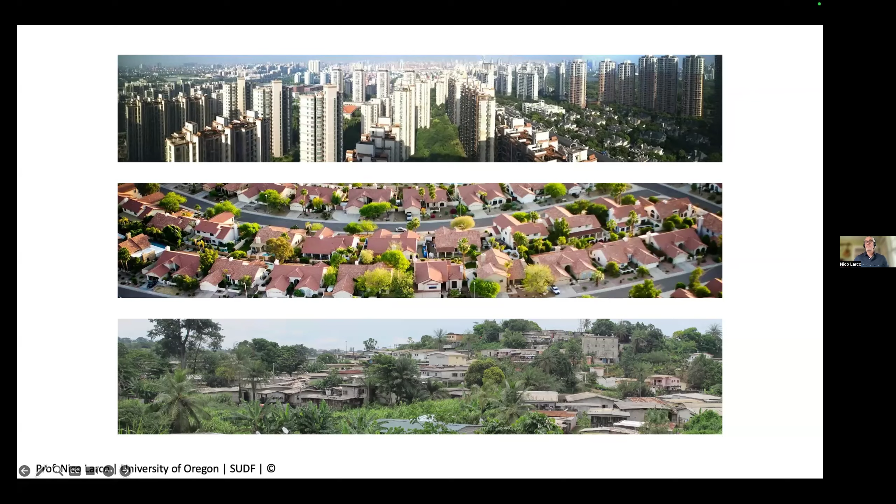Why is this important to do? Well, I think there's a lot of agreement—I'm going to guess people in this meeting agree—about some of the negative impacts of being unsustainable. But partly it's just to try to understand, if we want to be more sustainable, what kinds of things should we do?

What is it we should be focused on? What needs to be done? How do we compare and evaluate different places, and how do we shed light on false claims, looking at all these range of different issues that exist, everything from how you deal with stormwater to ecological areas to obviously transportation networks, metropolitan footprints. How do we put all these different things together?

And it ranges from all sorts of things—obviously a lot in transportation, urban ecology, urban forestry, a lot with stormwater kind of issues, equity kind of issues. There's a ton of different work that happens here.

The problem that exists right now is that a lot of this work is completely siloed, in that the people working on these topics know about them, but they don't know about the neighboring topics. There's a whole lot of jargon related to all these things. And because of all the siloing, there's very little overlap or understanding of how action around one topic is really impacting, or could be benefiting, other topics.

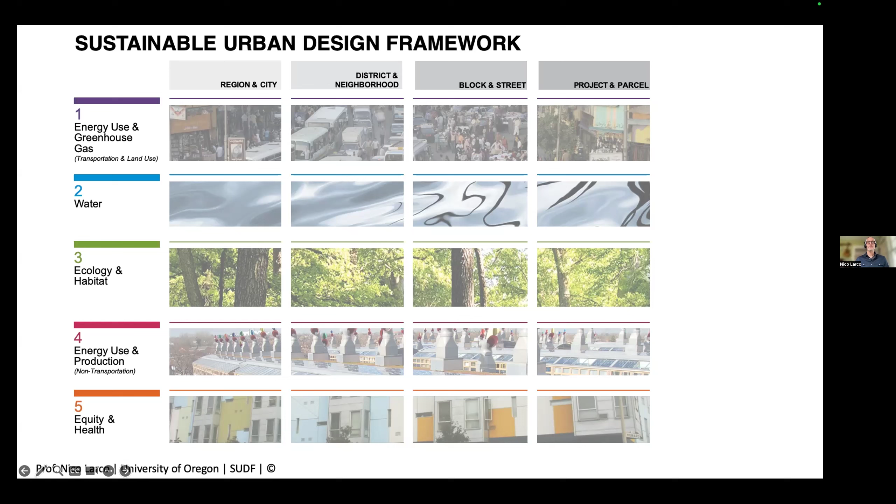So with this, we've organized over 50 specific physical urban design elements—physical things you can do in the city—around these outcome goals and these scales.

I just put a link in the chat, which you can use to download the actual framework. You don't have to try to read all of this here.

What this does is give you a tool to help you understand how you can work on projects. So for instance, if you have a project at a specific scale, this gives you an idea of all the questions you should be asking in that project. It gives you almost like a design guide, a sense of what kinds of things you should be dealing with.

You can also think about it in terms of outcome goals—if you really want a specific outcome goal, here's all the different things that need to happen at different scales to get there. So you can use this as a design tool, as a stakeholder engagement tool—stakeholders typically know this part really well, and it helps them interpret what exactly needs to happen in the built environment to get to that outcome—or as an evaluation tool. I'll talk more about those later.

So this is the basic structure of the framework.

So here we go. I'm going to go through fairly quickly some of these different pieces to give you a sense of how it's organized. I'm not going to be able to cover a ton of this, but hopefully give you a sense of how it works.

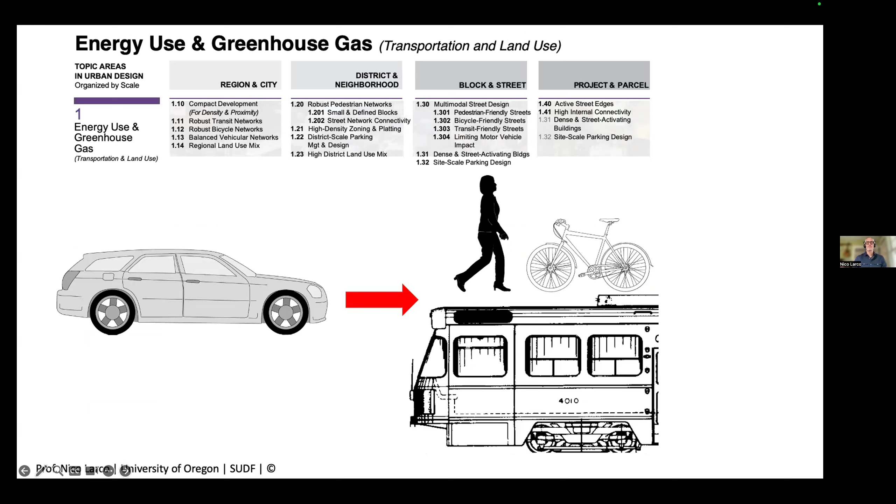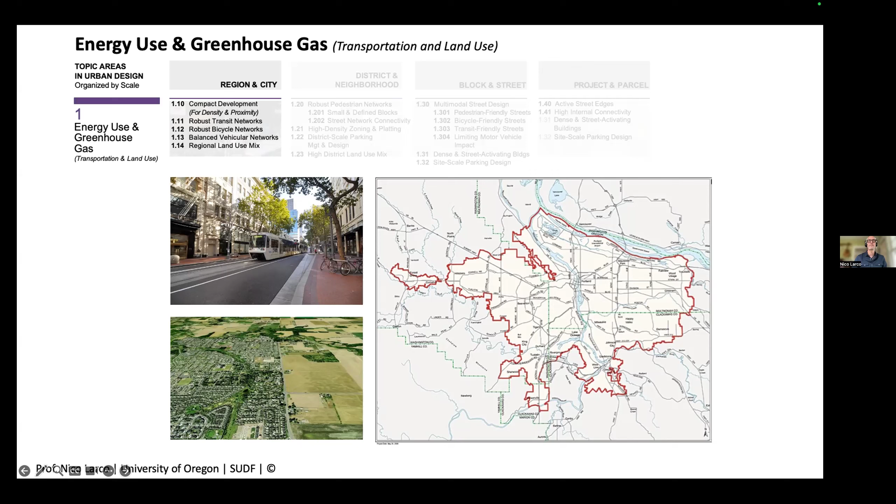We're also thinking at this scale about transit networks, large-scale cycling networks over the entire metropolitan area, and how we have balanced vehicular networks so we're not letting cars dominate. Then also the regional land use mix at this scale — how the distribution of uses across the entire region is evenly balanced, so we don't have all our industrial in one area, all our residential in one area, all our commercial in one area.

So that creates all sorts of problems, and we tell people, well, let's just get in the car, I'll just drive there. So this idea of connectivity, street connectivity, really matters a ton at this scale.

We can also think about our district parking approaches — how much parking we're requiring and if we're allowing strategies like district parking. And then finally, the land use mix at this smaller scale — this is the 15, 20-minute neighborhood idea that could be happening here.

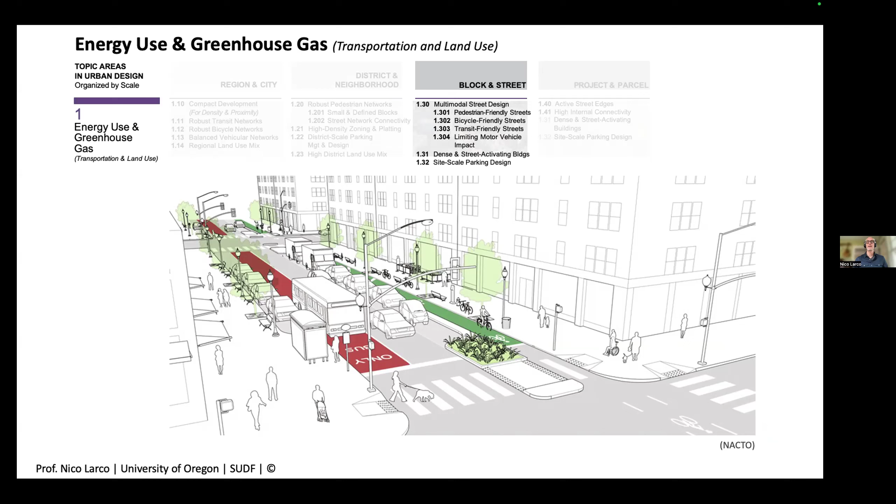We also think about parking in this part more — not just the amount of parking we have, but really thinking about the parking design.

So things like the scale. Is parking on the corner or not? Do we put the building in front on the street side of the parking? How big are our curb cuts that we have along that? What's the edge condition of the parking lot design? So we're really thinking about design of the parking at this scale.

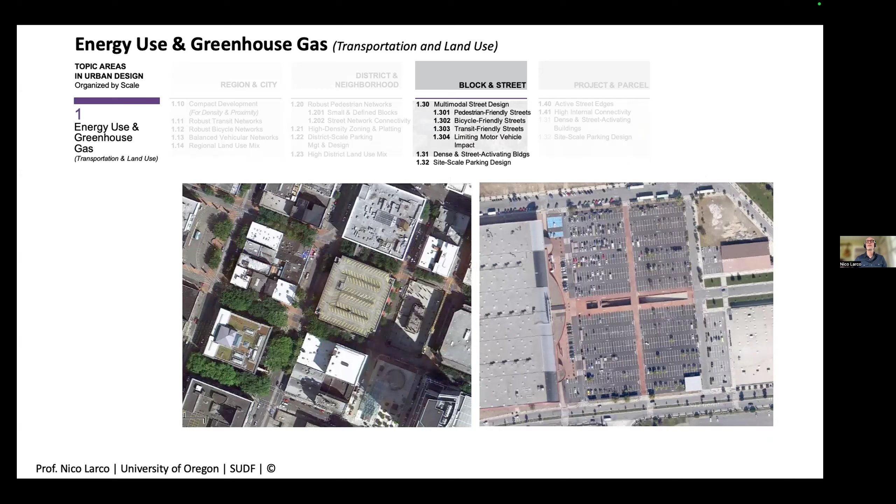And then finally, at the project and parcel scale, a whole lot of this really has to do with what we call active street edges. How much is the building really contributing to the pedestrian cycling environment on the street?

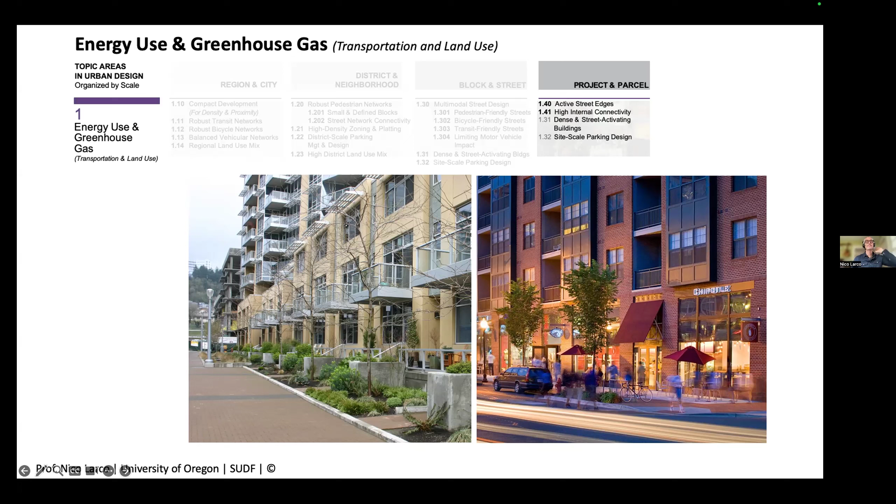Okay, so that's energy use and greenhouse gas, transportation and land use. I'm going to quickly go through some of these other topics.

So talking about water, there are really two strategies we think about: one, minimize the amount of runoff you have, try to have less water moving horizontally, and two, mitigate where runoff does happen.

This slide shows the difference in impacts of development. In an undeveloped area, when rain falls, 25% goes deep into the ground, 25% shallow, 10% becomes runoff, and the rest is evapotranspirated. In developed areas with a lot of impervious surface, only 5% goes into deep infiltration, 10% to shallow infiltration - huge problems for refilling aquifers. But then 55% is runoff, more than 5 times the amount we have in a natural system.

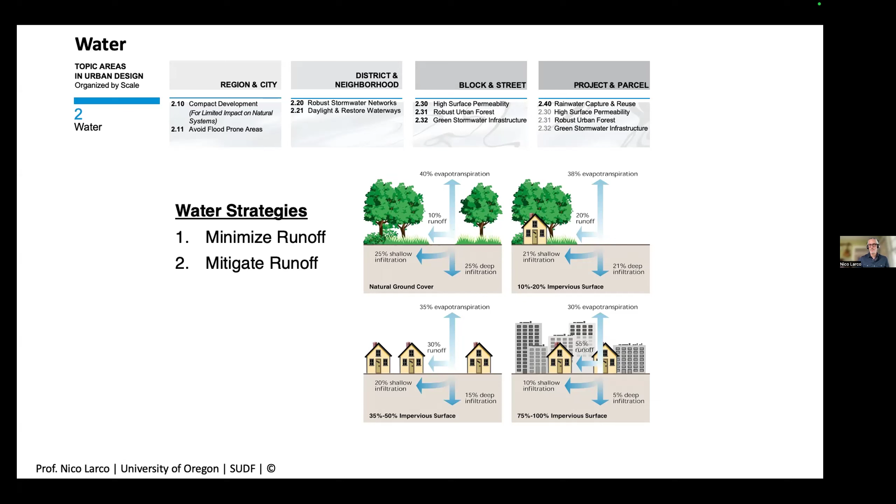So how do we deal with this? This creates all sorts of problems - the runoff is typically a large volume, hot, picks up pollutants, creates erosion, all sorts of issues.

So ways we can minimize the amount of runoff: first, at the region and city scale, really compact development. Instead of developing evenly across this entire watershed and impacting the entire water system negatively everywhere, concentrate your development in one area and let the rest of the watershed remain more in its natural state. This reduces the amount of roads, impervious surfaces, and pollutants brought into these areas. Compact development is a fantastic tool for all different parts of sustainability.

We can also do things like, at the block and street scale, reduce the amount of impervious surface - thinner streets or permeable paving can happen in these areas. And also, at the block, street, and project parcel scale, use trees. Urban street trees hold a fantastic amount of water before it ever touches the ground. You can see here, after a storm, how this area is completely dry, all held based on the canopy, branching structure, bark structure, and these types of things.

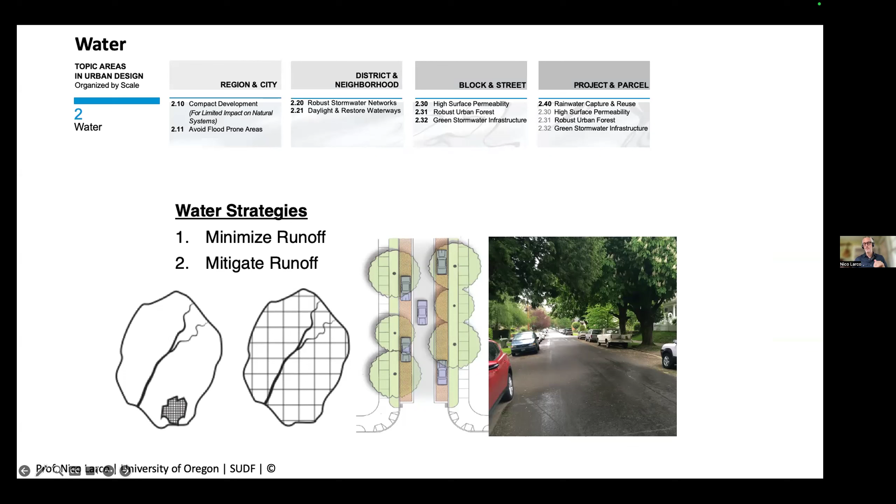If you do all these things and minimize the amount of runoff - the water hitting the ground and moving horizontally - the part you can't mitigate or reduce, how do you handle it? This is where this whole system of green stormwater infrastructure and robust stormwater networks comes in: everything from detention and retention ponds to rain gardens to bioswales, which let water move slowly instead of putting it into a pipe and moving it quickly out into a river or a lake.

We have this really different approach, which is to cool water off, slow it down, filter it, and put it back into natural systems. So instead of just getting water into a pipe and out into the middle of nowhere, this is always trying to slow it down, filter it, let it cool off, and then put it back into the ground itself or into natural systems.

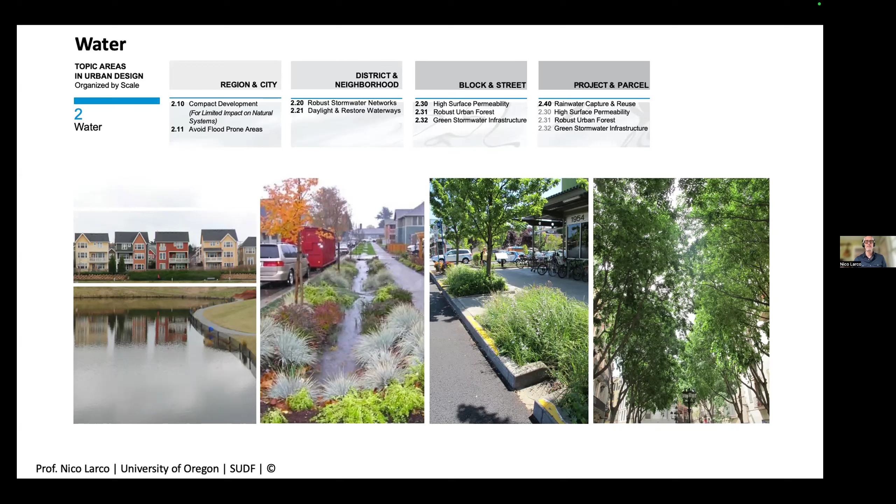Part of this whole mitigation strategy is trees, because as they pull water out of the ground, put it up into their leaves or needles, and release it into the atmosphere, they're actually creating more opportunity for water to come into the ground. This has a great effect in reducing the impacts of runoff and stormwater.

In terms of ecology and habitat, that third row there involves a bunch of different strategies: make sure you don't disturb things you shouldn't disturb, any critical habitat, mitigate where you do touch it, and then create microhabitats. Some ways that you do this...

Well, first is trying to create these fantastic, robust ecological networks, letting species move freely between areas and have the habitat that they need. Oftentimes you don't think of urban areas as places where we should be thinking about habitat, but there's a ton of opportunities for that. It actually absolutely is a place that we should be thinking about habitat.

This is a really good example of ecological corridors that happen through here, which let animal species of all types move all the way through these areas, creating much more diversity of habitat, diversity of gene pools, all these types of things. You see these all over the place in cities.

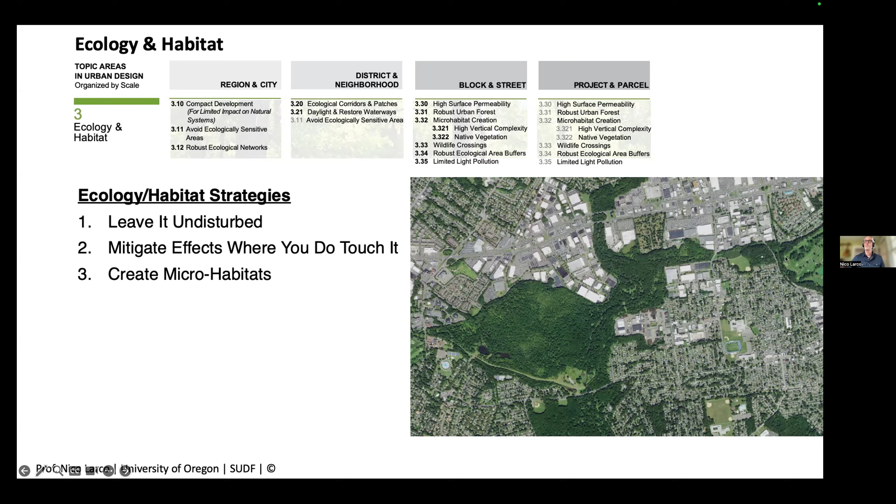You'll see that sometimes what happens, though, is that there's infrastructure that goes through these areas. So how do we deal with these wildlife crossings? This is at the block and street scale. Well, there's a ton of strategies for dealing with that.

Creating culverts, which are designed - this one specifically for turtles in Maine - or larger ones for larger mammals, or the most robust one possible: this is a land bridge, the Tobin Land Bridge in Texas, where you actually create this fantastic connection between different habitats across a fast-moving freeway, which would never allow all sorts of species, be it larger or smaller animals, to cross easily. So these are all ways that we can help create that robust ecological network and let species move easily from one place to another.

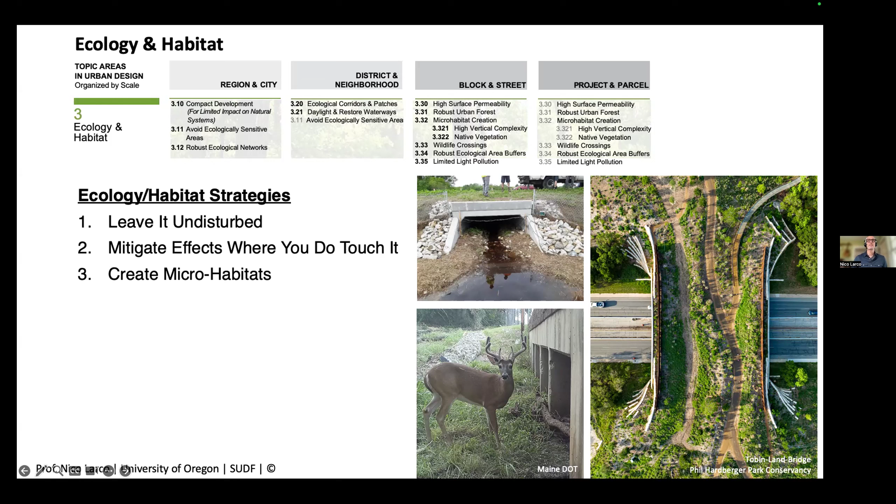Thinking about different types of habitat that we can do this in, either core habitat or edge habitat, and different types of connections, from stepping stones to corridors and such.

Thinking about things in terms of how much we need to buffer certain areas. So this is here in block and street, robust ecological area buffers. If we have development next to critical habitat, how much space do we need? How do we create that space between these areas so that you don't have impact? There's lots of fantastic resources to show you how to do that.

And I'll talk in a bit about the book, which gives more information about each one of these topics. Another topic is something we talked to a lot of ecologists and biologists about: what is it urban designers should think about in urban areas to help with ecology?

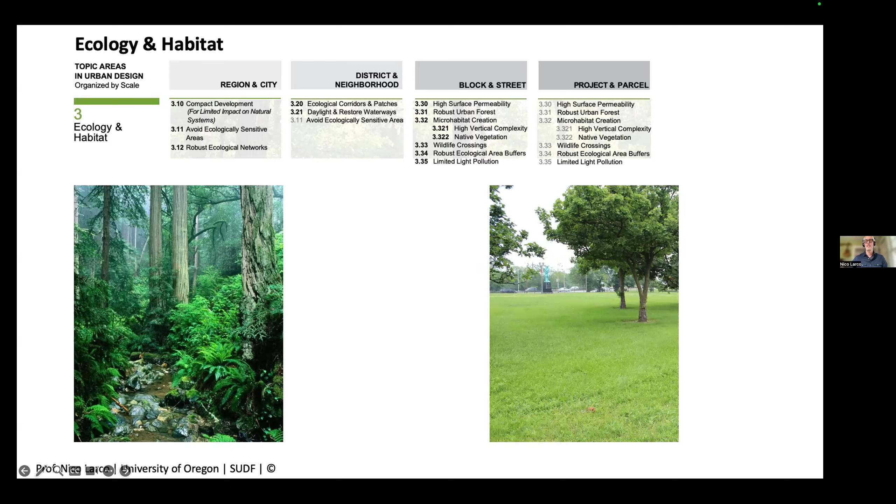A point that came up repeatedly was this question of vertical complexity. So instead of having things that are simply lawn and trees without a whole lot of structure, really thinking much more about the way that our natural forests work, with this whole range of different structures of tall trees, smaller trees, different canopies, bushes, shrubs, sedges, ground cover, all working to create this range of different structures, different habitats for different species.

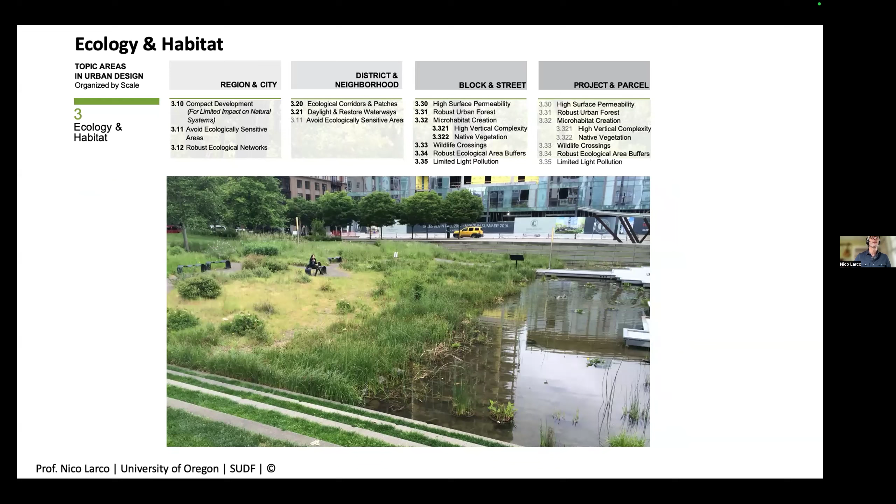Opportunities to create microhabitat - places that help create robust habitat within areas. We work as urban designers at large enough scales that we can do these types of things as well. Okay, two more to go: energy use and production.

This is again the question of not thinking about the transportation side, but how it is that the built environment is really impacting energy use overall outside of transportation. So obviously this changes a whole lot depending on the climates.

These are a bunch of the climates that we look at in the book. To give you an example, we think about different building typologies and how they might work better or worse in different climatic zones. So as an urban designer, what zone am I in? What makes the most sense in terms of typologies? How do I make sure with zoning, with platting, and with solar orientation of blocks, that I really take advantage of these things?

We can also think about energy use and production through things like the color of the environment. We know about the albedo effect, where darker colors end up absorbing heat much more. This is an example in Barcelona where they've literally greened the entire sidewalk.

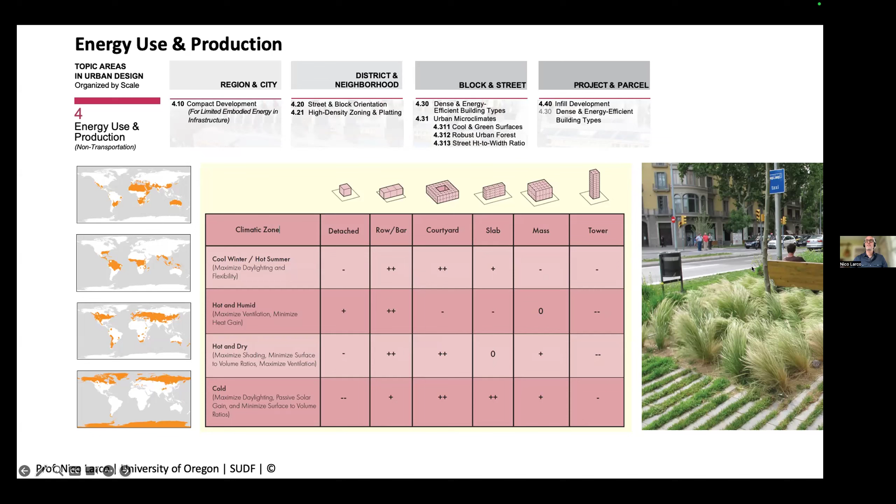Finally, with energy use and production, we can think about how the built environment itself impacts embodied energy, how much energy it took to make and maintain an urban area. These are examples of varying density, from Florida all the way to New York. Think about how much energy went into the infrastructure, the roadway, the water infrastructure, the electrical lines, and how many units are being served by a block in New York City versus a block in a suburban area. Tons more energy use in the embodied energy of the suburb for a much smaller population being served.

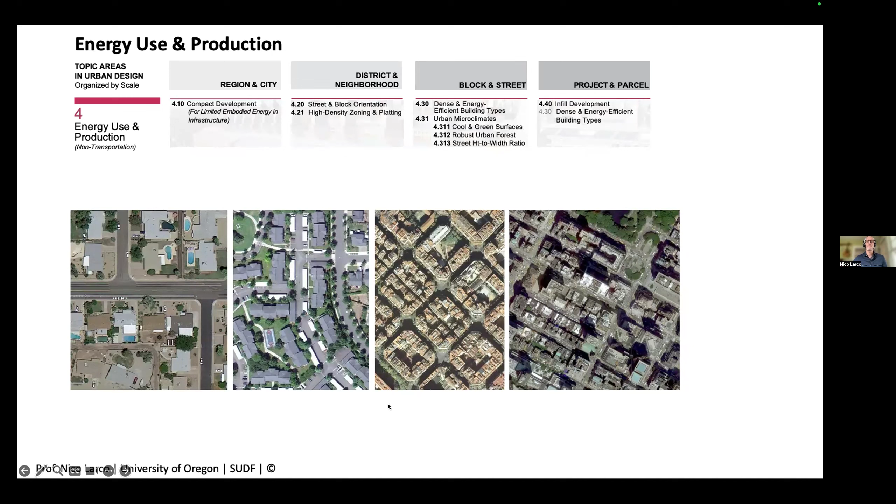Finally, with equity and health, we're looking at different areas. Affordability: how is it that urban design is affecting affordability? Everything we talked about with transportation in terms of energy use also has to do with accessibility.

It turns out the car is an expensive way of moving around, and if we can make bike, pedestrian, and transit easier to use, it's actually fantastic for affordability and accessibility. For affordability, we can also think about the mix of housing unit types. Lots of research has shown that the higher the mix of unit types, the lower the cost of rents overall.

In terms of physical activity, we're talking about whether there are parks nearby, and if so, what amenities they have for what age groups—for older adults, for young kids. Tons of research shows that one of the biggest indicators of whether you'll exercise today is how easy it is for you to get to a place to do that exercise. So it's really important.

With safety, we're talking about limiting point source pollution and its location, making sure, for instance, that we don't have schools right next to freeways, or industrial areas that create pollutants located near residential areas. For those of you in Portland, the Bullseye Glass factory was a really big issue a couple of years back.

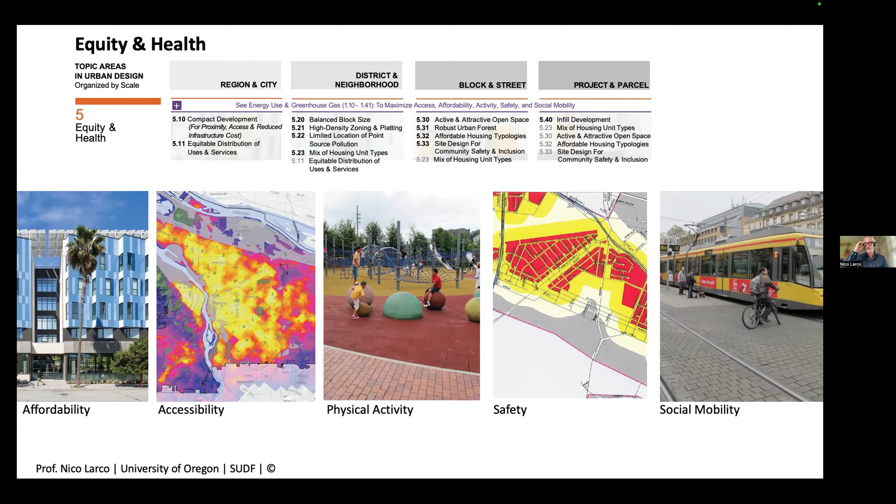And finally, social mobility. Lots of parts of how we create the built environment really affect people's ability to improve their socioeconomic situation—how easy is it for me to get to my job, to services, to healthcare, to school, to education. How affordable is it? Do I have funding to improve my economic situation, enough so I can invest in that?

All right, that was a lot to go through, but hopefully it gives you a rough idea of the types of things that we cover in the framework.

As I mentioned before, you can use the framework on the one hand to think about what your outcome goal is that you're interested in, and then all the pieces, physical design pieces that plug into that. I call this often this magic decoder ring that helps, especially community stakeholders, understand if they want this, these are the things that need to happen.

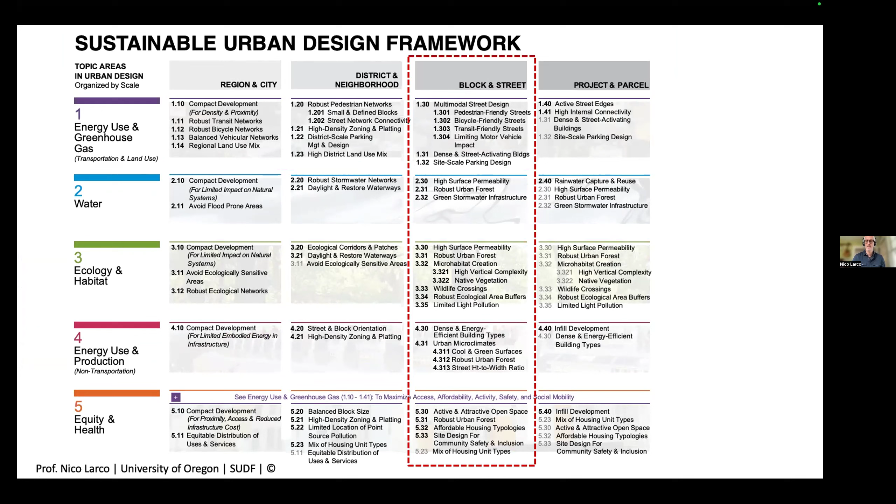On the other hand, you can think about having a project at a specific scale. These are all the pieces that you can be asking about, that you should be thinking about as you do the project, that you should be asking if you can actually address those things.

The framework also helps you understand synergies and co-benefits. So, for instance, an example I like to talk about is Ramblas in Poblenou, the Poblenou Ramblas in Barcelona.

If you think about how it is we think of trees, typically many of us who've decided what trees are going to go in a certain project, oftentimes we're going by what happened in a recent project, or whatever a city's recommended species are, and we typically go 20, 30 feet on center for a tree.

Well, you can actually think about this much more robustly, looking at all these outcome goals that you want. You can think about how you position a tree in a way that helps buffer between a pedestrian area and a vehicular area, or how it helps create a really wonderful pedestrian environment.

In terms of stormwater, we can think about what species we're choosing and what their canopy structure is, and the extent of that canopy for stopping water from ever touching the ground.

In terms of ecology and habitat, maybe we should be thinking that these trees should not actually be 20 foot on center or 30 foot on center, but instead clustered, and that maybe we shouldn't have a single species but a range of different species, and more vertical complexity at the base of these trees.

In terms of energy use and production, we can think about where these trees are located and how much shade they're producing. Are they helping shade a building? Are they on the south side, or east or west side? Are they helping to shield from wind?

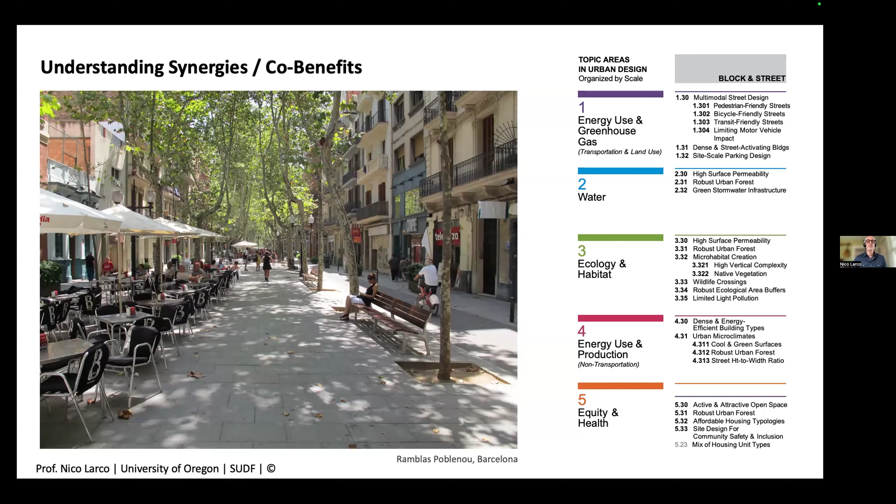And in terms of equity and health, we can think about things like what kind of species we're using, and whether there are allergens created by this. So again, you can use this framework to help make more sophisticated decisions and understand synergies across things.

So I'll just end with a couple more slides here. You can use this as a design tool. As I mentioned, you can do evaluation using this framework of both existing conditions and potential scenarios, stakeholder engagement, and then you can also use it to figure out your design team composition.

We've worked with Gehl's office a couple of years back, looking at a bunch of their different offices, having everyone fill out the framework in terms of: is this something I know a lot about, something I'm not sure about or know a little bit about, or something I don't know anything about. You can quickly get a landscape of the expertise you have, how you might create teams, and what your next hire might be.

I'm going to skip this—this is just how we've used it in a project. I'm going to skip that real quick and just talk about the book itself.

So the Sustainable Urban Design Handbook took about 10 years to create. The framework itself was created about 14, 15 years ago. And the Sustainable Urban Design Handbook was just published in April, and we're super excited to have that out. The way it's structured basically takes the framework, and then each element in the framework has its own chapter. I'm going to show you what one of those chapters looks like.

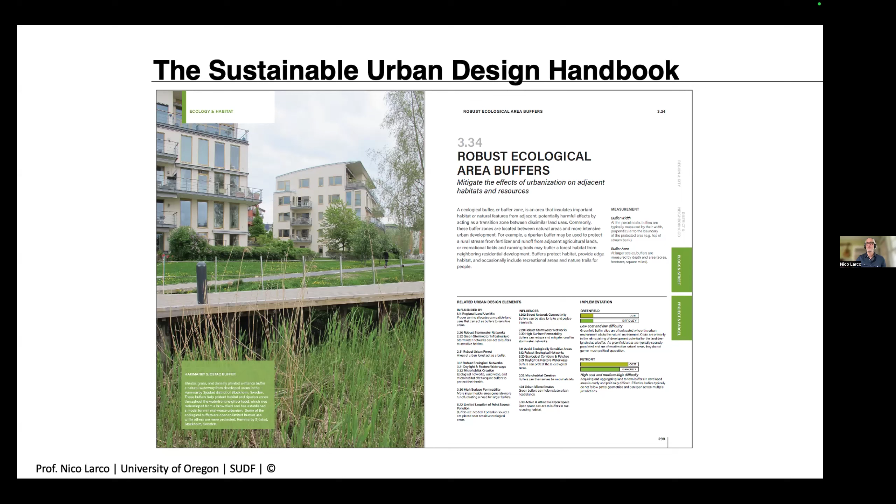Implementation talks about, in greenfield and retrofits, how much it costs or the political capital you really need to make this happen, relative to some of the other elements.

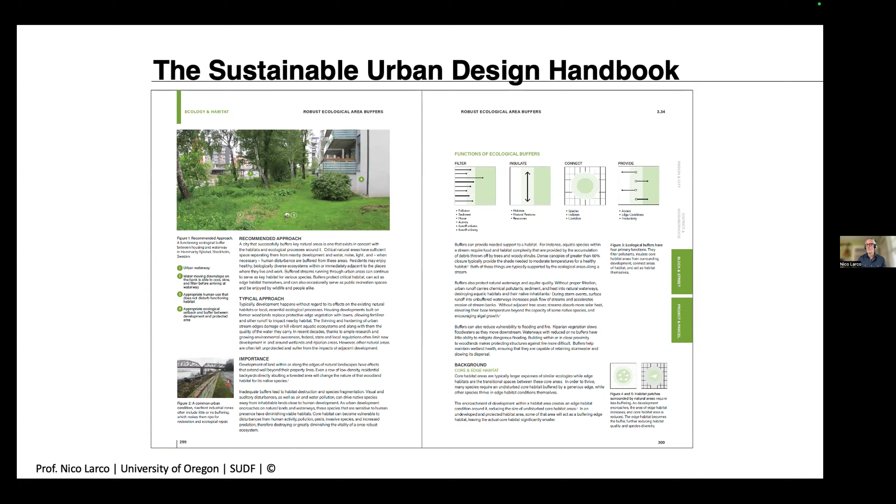Each of these chapters, again, each element has its own chapter, has a recommended approach—this is what we're trying to get to—and a typical approach, which is often the stuff that we build, and that's not so great. Why it's important is where we have the peer-reviewed journal information about what you're trying to get to, the outcome, how this affects the outcome you want.

Some background information for those who don't know a lot about ecological areas: understanding the difference between core and edge habitat, where you might buffer, and some issues that might impact the characteristics of your buffer. We have a section on considerations and caveats, which is really trying to get you to be just a little bit more sophisticated about this topic.

Understanding how it interacts with other elements a little bit more, political issues you might run into around this, maintenance and operation issues you might run into, and some other issues.

And then finally, the design guides—these are guidelines for urban design where we've distilled a ton of cutting-edge research and best practices into basic ideas of the types of things you should be doing. This gives you some rules of thumb, some guides about how best to make decisions so you don't create problems later on.

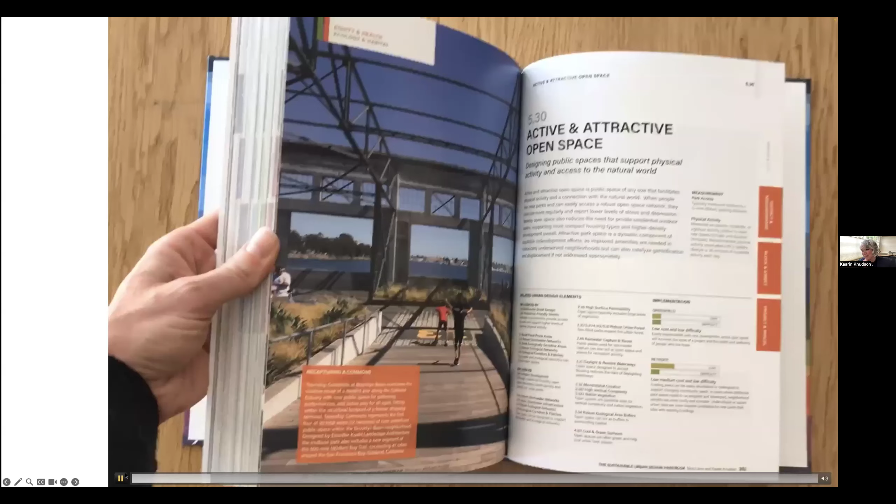Thanks, Nico. Hi, everybody. I'm going to share some slides and thoughts pretty quickly, including a 10-second view window inside this book. Because if we were together in person, we could show you this work and hand around a copy in the room, and you could get a sense of what is in these 450 pages of research, including a really stupendous glossary, I have to say. As an architect trained as a journalist, I really appreciate the different information we put together to share this work.

But one of the driving things to take away is this really comes back to a deep belief that cities are places for both urgency and optimism in our work related to sustainability. I think all of you here in this room and on this call understand and believe that, and practice that every day in your work.

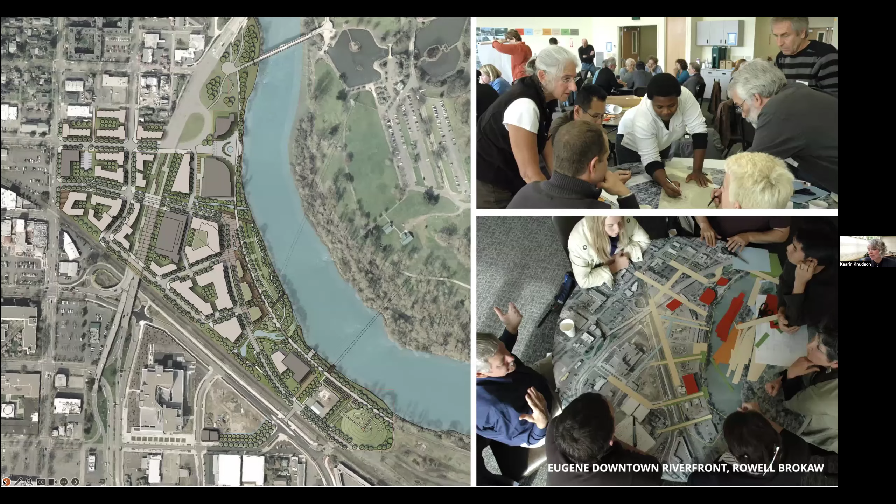I'm really fortunate to have had the opportunity in my local community to work at a lot of different scales over this last 25 years, and also in a lot of different ways—from practice in a generalist and traditional architectural practice, doing a lot of work with communities and intensive community engagement work, doing public interest work and housing advocacy work.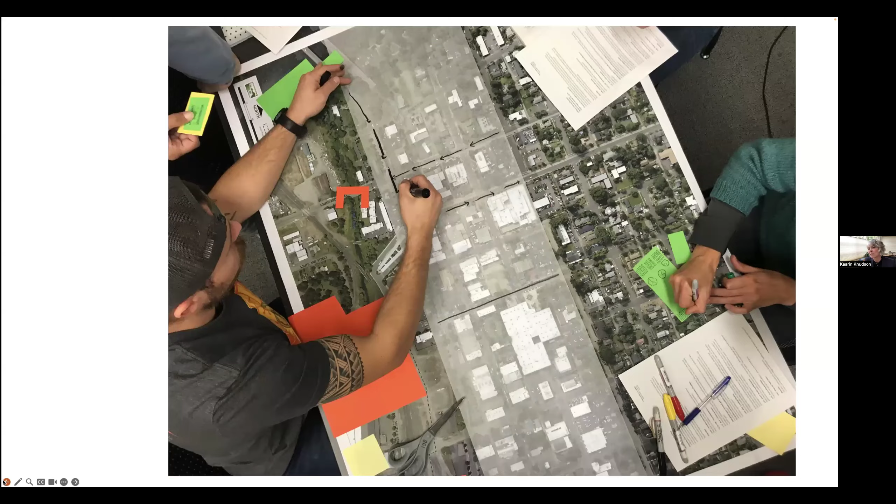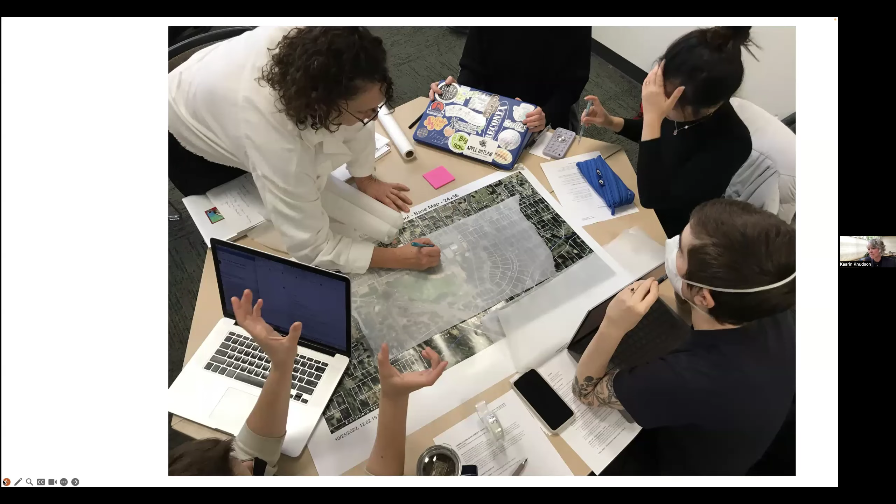And then also teaching. One of the things that Nico was speaking to that we're trying to address with this book is that as you're digging into any place, as students, specialized professionals working in integrated teams, but especially people who are new to this work and don't have 25 or 30 years of specific project experience behind them, the work of urban design can be somewhat overwhelming. Understanding how to enter a project, what influence you might have depending on the scale you're coming to a project through, the extent of the reach that you have—it can be overwhelming.

Our hope with this work is that by building on the research of this last many years that Nico mentioned, we would be able to help people overcome that sense of it being too overwhelming, the questions or opportunities feeling too large, and that it wasn't maybe something appropriate to engage with on a project.

In many cases, this comes back to the fact that we have to do some things differently. We have to do a lot of things differently. For professionals advising others on how to approach the world and our work, wanting to be both sensitive and empathetic to the environments we're in, there's a deep understanding of context and response to context, but also a lot that we need to do differently. Capturing that within your mind and bringing that to every project is one of the keys to applying this work.

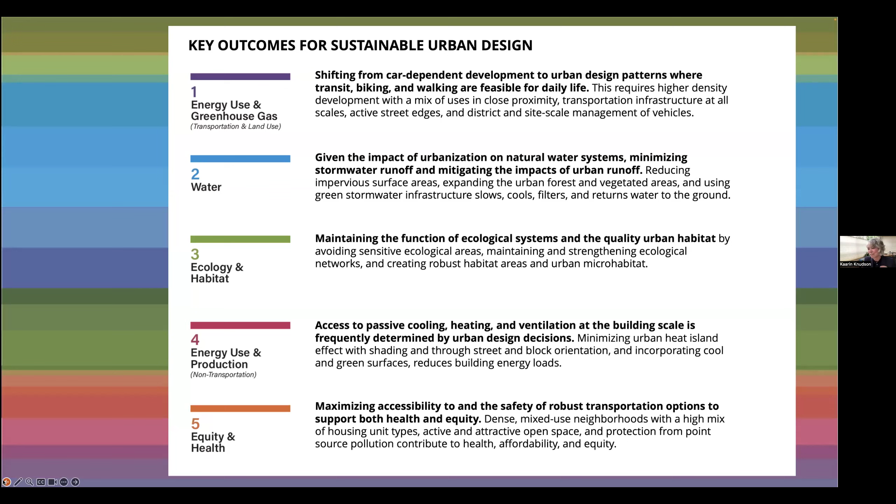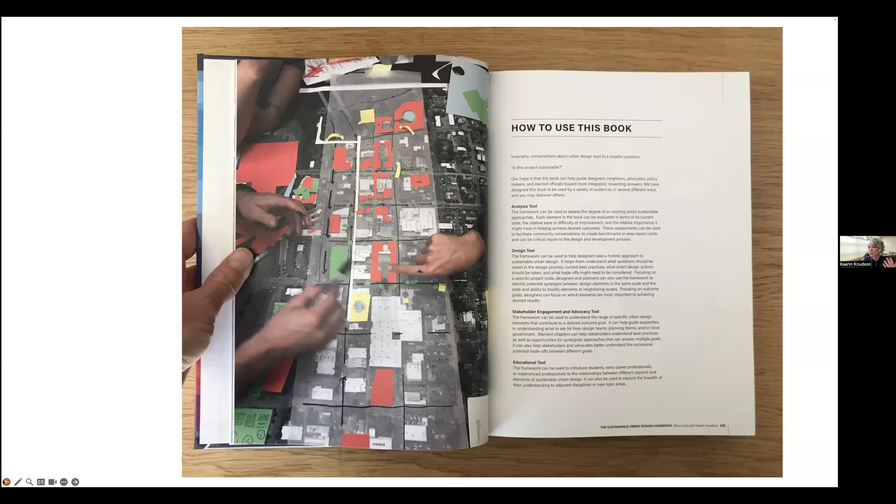So Nico talked a bit about how to use this book, how we organized it, how it was designed—translating the work of the framework into a reference that was multidimensional and also applying spatially to the world was challenging. It was fun to also include Easter eggs, like pictures of former students' hands in photographs within this book.

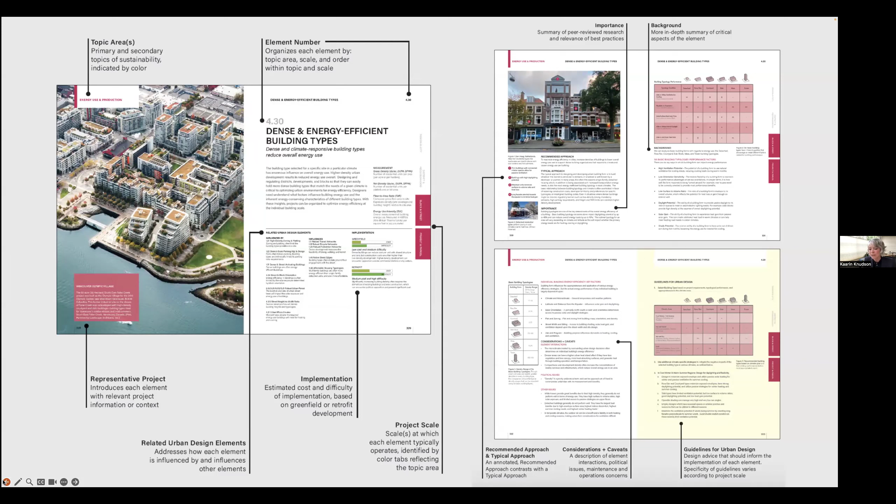But we're hoping that for people who want to use this as a resource, as Nico described and this graphic shows, there's a lot of dense information presented in a way that is accessible to people, that makes the questions being asked, the complexity of the problems or opportunities, accessible—that we would actually be able to present this in a way that could help people see the interconnectedness of our concerns.

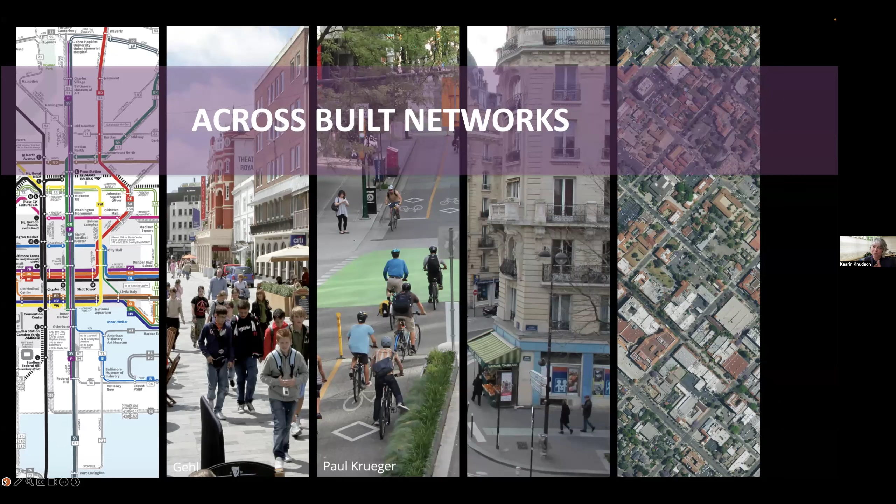In this work, we're talking about understanding the opportunity of sustainability and improvement within our cities—building more livable, more sociable, more equitable places across the built networks of our environments, but also across the natural systems and natural networks that exist within cities.

And so to show you some of that here, I want to be sure I'm not making that whole side of my screen invisible. Hopefully you can see everything that I can see on my screen. It all looks good. Oh good, thank you, Nico.

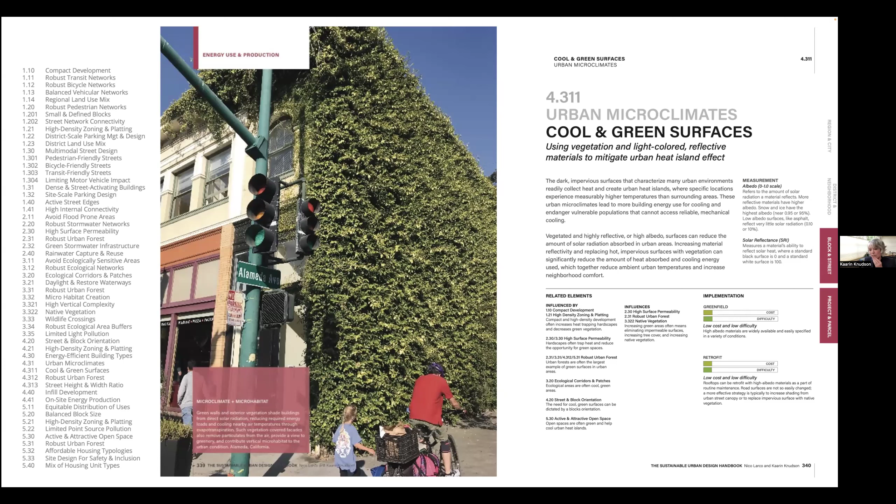In the case of understanding these chapters and how the book is laid out, one hope we have is that it's really easy for people to see the connection between something like being concerned about a robust urban forest in your city, and that also connecting to concerns about ecological corridors and patches of functional ecology and habitat within your city, which also connects directly to urban microclimates and how we can be naturally cooling the cities we live in, providing more sustainable places where human lives are not at risk due entirely to urban heat island.

All of those choices related in many cases to the natural networks and systems within our cities support human behavior and support the built environment—things like pedestrian-oriented streets and bicycle-friendly streets that an urban forest canopy, connected and extensive across the city, is going to support. And all of that relates to an activation of our street spaces and public realm that's really delightful.

Another way to think about this—throughout the book we worked very hard to present something that would be graphically instructive and accessible to people, because so much of the science behind this research is quite dense.

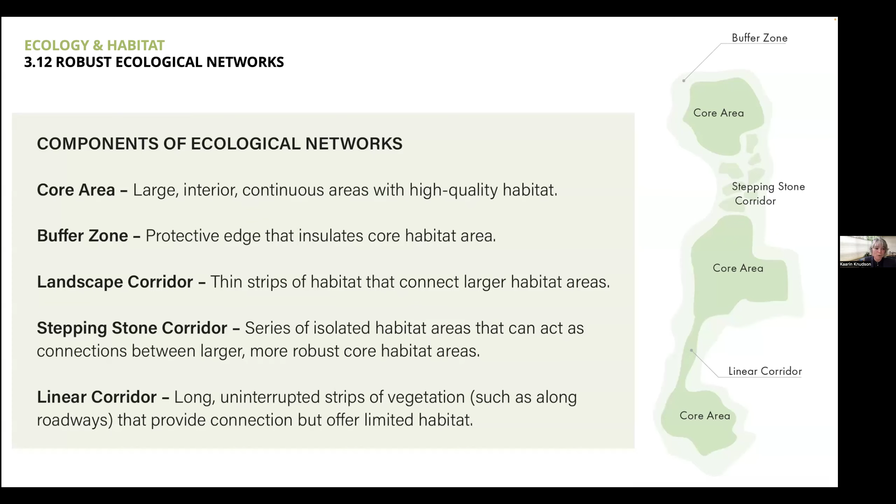In the case of understanding, say, robust ecological networks, you need to understand the components of that network, but also the core areas, stepping stone habitat, linear corridors. And if you're thinking not about a network but about, say, an ecological area buffer, you also need to understand the functions of those buffers, since there are specific functions that ecological buffers provide.

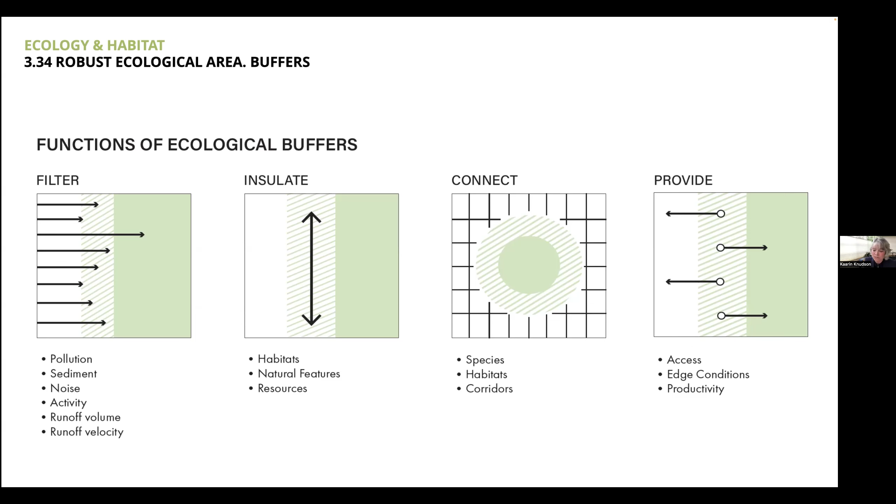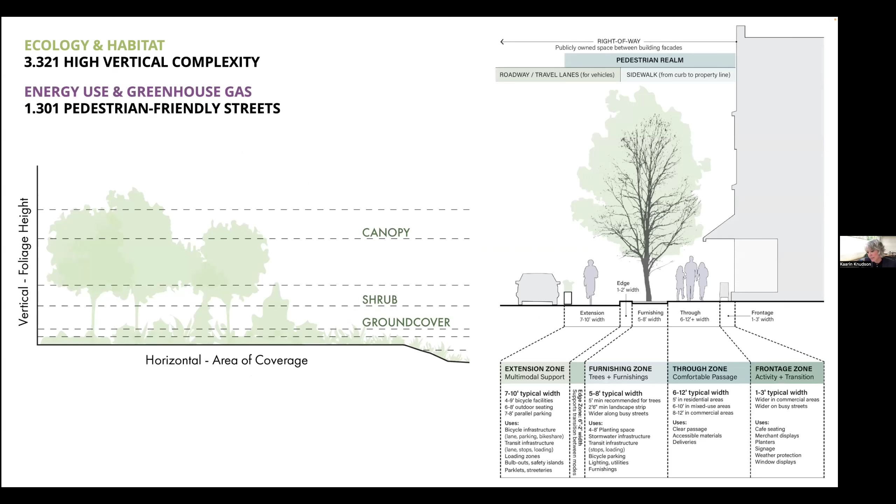When you're thinking about those kinds of spaces within a city, the vertical complexity you can include within those same areas can be as influential as expanding the area of green space or open space you're working with. That is also an ecological opportunity present every time you're thinking about something that might seem a much more urban or built intervention, like the design of a street or a transportation corridor—a network of connectivity that has the opportunity to be both activated and more ecological in its performance.

The last piece I want to share is that in the work we all do professionally, the challenge right now, but always, is that in every project we have to both express and connect to values and navigate and manage conflicts. There's a lot of opportunity, and I've had the chance to work with wonderful colleagues on how a more intensive urban design response might influence architecture at the site scale.

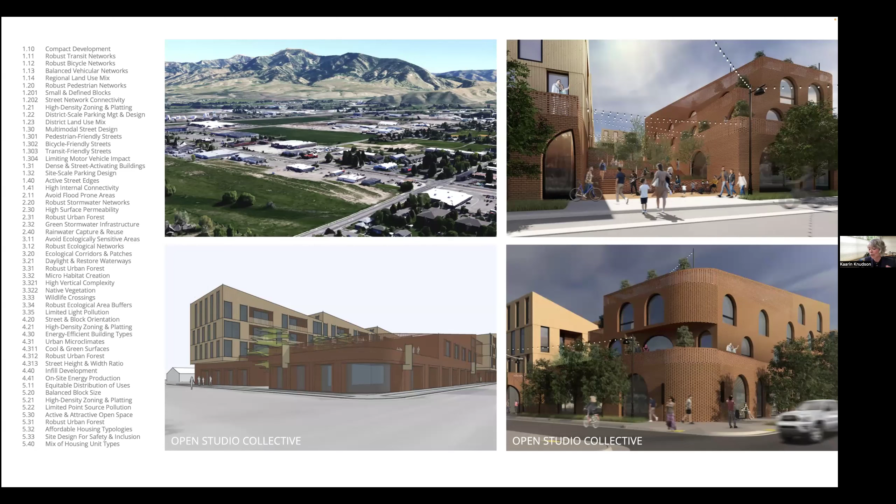There are ways that understanding this work and applying it through intensive redevelopment processes helps communities understand decisions like investing in stormwater infrastructure versus sidewalk connectivity versus alley or block structure. These are important decisions community members have to make, but if they don't understand how those built decisions connect to their values, it's much harder for them to feel their engagement was purposeful and meaningful. We're hoping this book can help people with that.

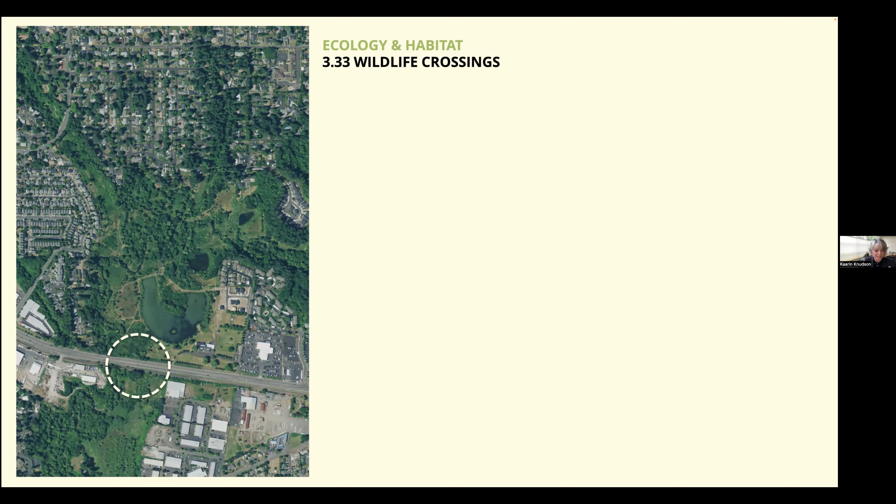Lastly, I'll offer this as a metaphor of our times. You could look at the green infrastructure network in this image on the left, see the extent of it and that highway crossing, and think: how unfortunate that decisions made a generation or two before the one we're practicing within decided to sever the connectivity of this natural system.

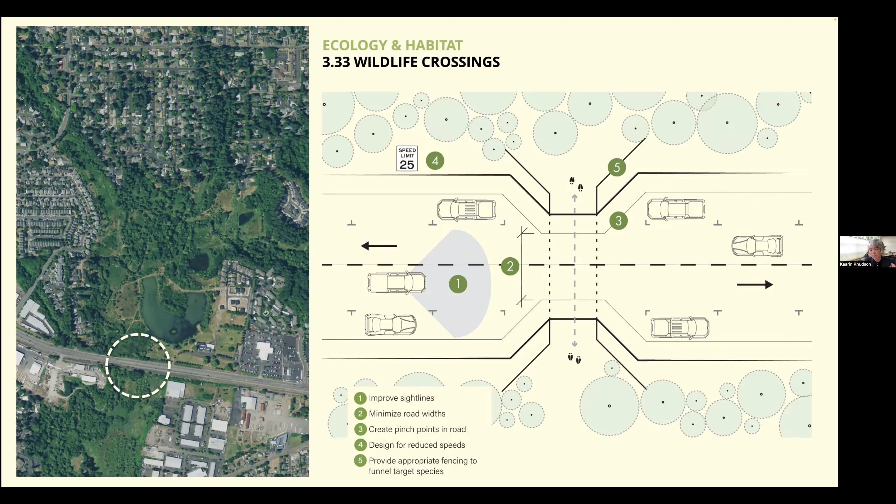And isn't it terrible to think these things are forever separated and we'll never reconnect them? When in fact, through thoughtful design intervention at different scales, it's not always a massive wildlife corridor bridge in an area of sensitive habitat—sometimes it's just knitting back connections at a finer grain and smaller scale.

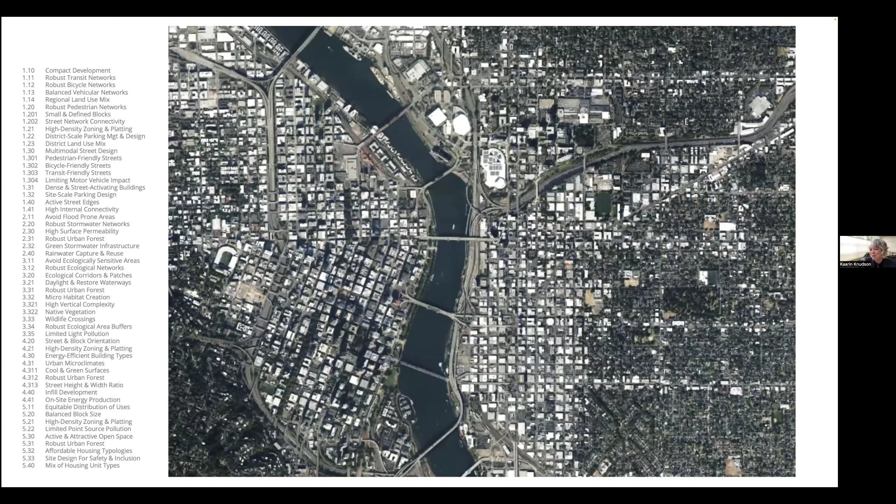As we know how to do that in our community with all sorts of projects, we will be better off. I'm applying this work now in my responsibility as mayor of Eugene, and I hope you'll also find ways to apply this work as you think about Portland and the larger metro area. With that, we're happy to answer questions, and thank you all for being here.

Thank you so much, Nico and Kaarin. I'm a huge fan of the book, and just a note—I was equally impressed by the content and the format, where I think it really leverages the format of a book. Managing this information, I imagine it perched on a desk, tattered and used so frequently. It's an incredible wealth of information—not just the content, but it also lays out a strategy, a roadmap to navigate this matrix for such relevant projects. So thank you so much, it really is a critical tool.

That is so great to hear, because the difficulty of doing a lot of this work is that there's just such a volume of it, so many pieces. A lot of what Kaarin and I really wrestled with was how do you distill this down to something that gets to the core part of it and communicates in a way that's easy to access. A whole lot of focus was on being easy to understand, easy to navigate, so that someone who's a professional—like most people on this call—but also a community stakeholder, could pick this up and be like, oh yeah, that's right.